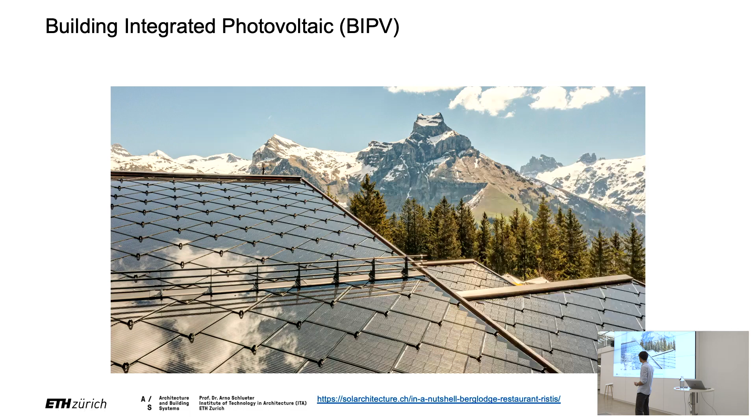Photovoltaics, you probably know, is a technology to convert solar irradiation into electricity. What's the difference to building integrated photovoltaics? It's a little bit undefined, let's say, but it should be on buildings, somehow as part of the building fabric, or attached or integrated into it. Here you see a nice example where the roof shingles are designed in a certain way, still reminiscent of old shingle design. You can simply put them onto your roof and still reveal the full aesthetics of solar cells. But you can also conceal them entirely. This one is a tower in Basel by Burkhardt and Partner, and many people would probably not know that this is a BIPV facade, because you can't really tell.

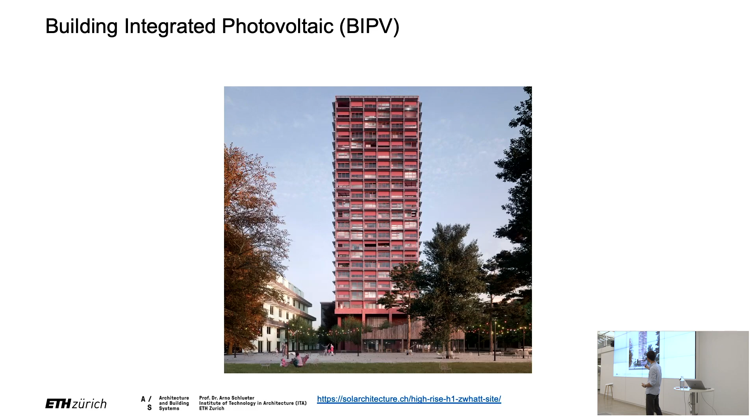Yes, there are some other examples. This one is by Boltshauser, an architectural professor also here at ETH, and they use Brise Soleil with PV, also really nicely integrated. And then you have more prominent examples, like this Novartis pavilion, also in Basel, where you have a BIPV facade integrated with a media facade. So in the evening, it shines with sparkly LEDs. Also, this one is BIPV.

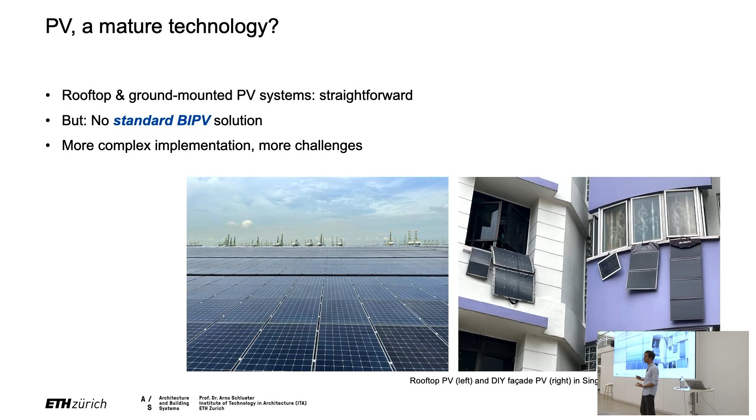What's the point of showing you all these examples? I want to highlight the difference to regular photovoltaic, roof-mounted or ground-mounted PV systems. This one you could quite safely call a mature technology. There are, of course, questions around it, but it's a rather straightforward technology to use and implement. In contrast, if you think about BIPV, there's no standard solution. This is a picture we saw in Singapore, you could also call it BIPV, but there's no standard BIPV facade. Every facade is more or less customized and special depending on the project, which means planning BIPV facades and buildings is more complex. It requires more specialized expertise and more challenges that need to be tackled, and that's why it needs a 360-degree view onto the topic of BIPV.

Specifically, we are talking about urban integrated photovoltaics. Anytime it's about buildings, the urban context also plays a role, and we have a plethora of topics to cover.

Of course, you want to design these facades, and that requires some engineering behind it, some simulation. That's a big topic in our module. You want to look into the technology and solve constructive problems. System integration is a topic, and how it reacts with the urban microclimate is also a topic. On top of all that, it's important which business models you apply, how you ensure social acceptance, and how it plays into the bigger system of how humans want to adopt this technology.

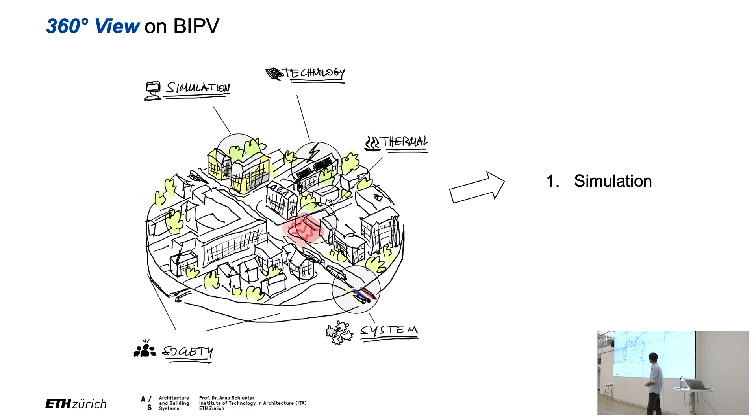So in this talk, we will have three bigger themes: simulation, optimization, and machine learning. And I will go through each of these three themes now.

So let's jump into the first topic, simulation. The subtitle is SML-XL for the architects here. It also shows the range of simulation aspects that we cover in this project. I will actually start with XL.

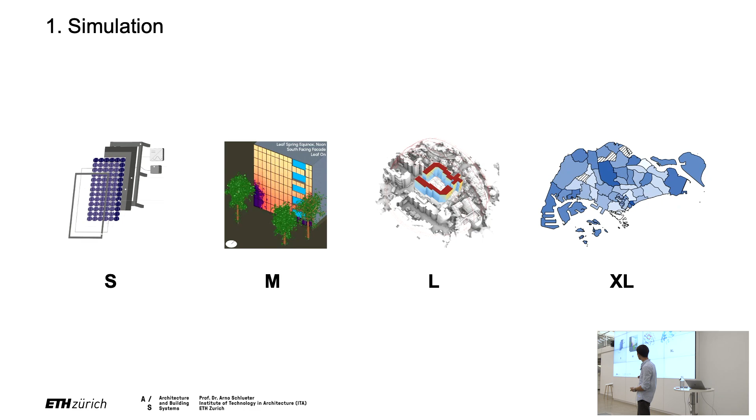Of course, the first thing that you would want to do is to assess the entire PV potential of a city, let's say. And we did that for Singapore. There's not so much magic behind that - these are quite established simulation programs, Climate Studio in that case. We simulated the whole city of Singapore in a rather high resolution to figure out what the solar potential is.

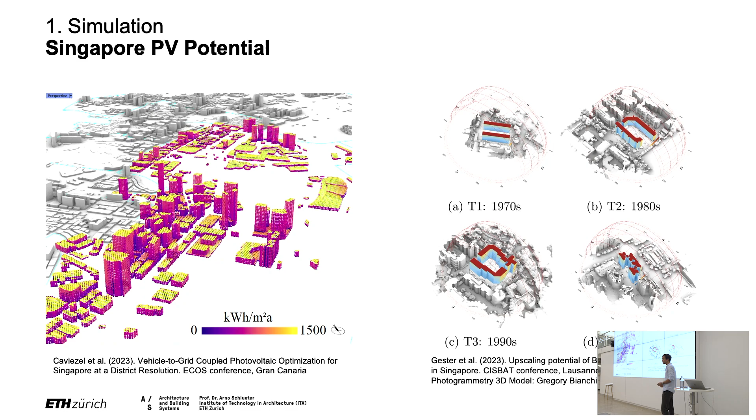Now, if you compare that image with that one, of course, you see some spatial differences, which would also result in certain detailed differences in how you perceive or estimate irradiation. That's why for certain typical typologies, we conducted photogrammetries to have a high resolution in the modeling.

What we found is, first of all, you can plot the whole city and look at where there's more irradiation, where you have a higher potential on buildings. Then you can split it up into these districts - let me explain this graph. Each column is one district, and it shows the ratio between energy production on facades over roofs. Anything above the dashed line means that district has more PV potential on facades than on roofs.

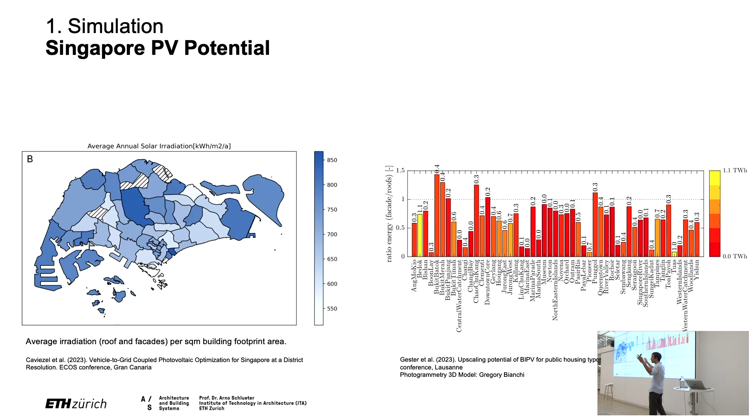That's quite special, especially for Singapore as a dense city. It means you can produce more electricity on facades than on roofs, which is very interesting. We can see there are a couple of districts where this happens, and this is where BIPV becomes especially interesting for us. If we add all these numbers together, in Singapore you could achieve 20 to 30% self-coverage of the total electricity demand. This is rather on the optimistic side, and we will see now why this might be potentially overestimating the potential. But in theory, it's possible.

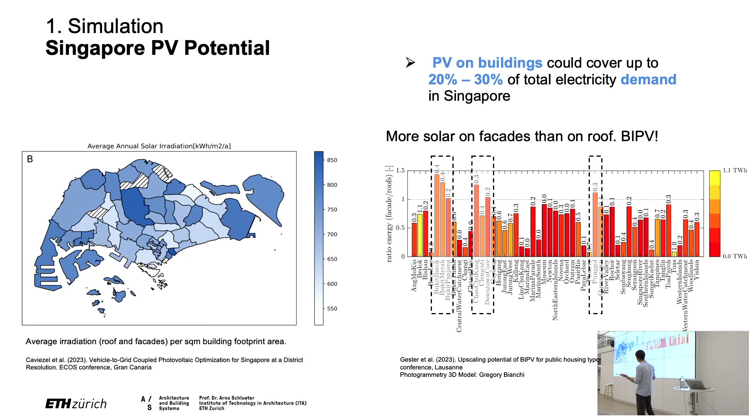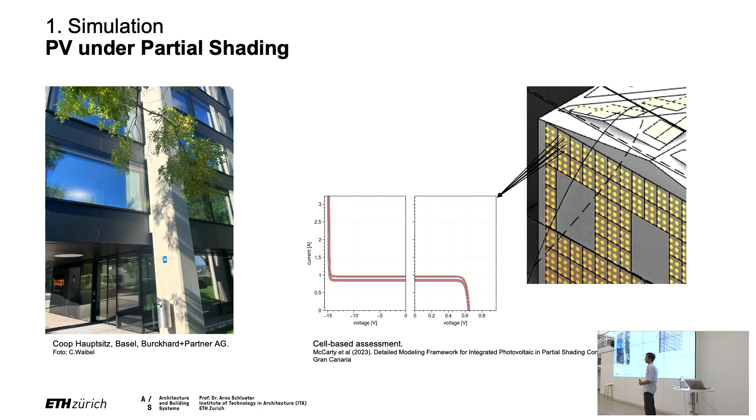In fact, most of the larger studies, most of the energy system studies in the literature, most of the assessments and simulations, they basically only simulate the irradiation on surfaces, and then say, okay, whatever irradiation I have times my conversion factor, and that's the electricity I can produce. What that assumes is that each of the solar cells actually produces electricity and is more or less decoupled from the entire module. Well, that's a bit too simplified, because in reality, we have electrical architectures.

For roof-mounted or ground-mounted systems, usually you only need one inverter. To spare you the technical details, they're all connected in one, because they have a very homogeneous shading situation, or no shading ideally.

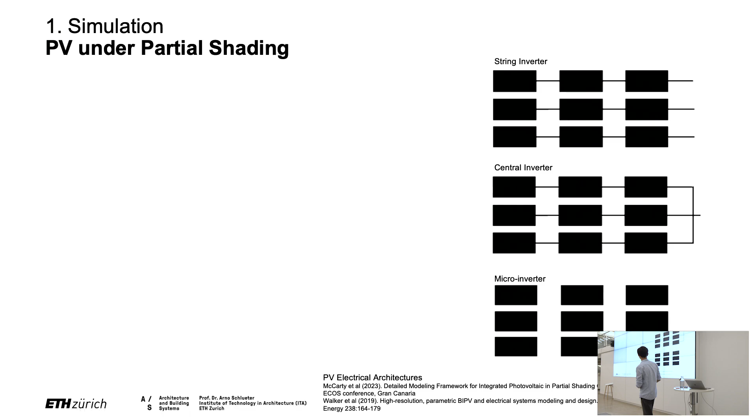On buildings you have very heterogeneous conditions, which means the current status quo is that you have string inverters. You string together several modules that are similar in size and irradiation condition, and they produce electricity or don't once one of these panels is shaded. Then you have microinverters where each module has its own inverter, and even if one panel is shaded, it doesn't matter for the rest, because each has its own control system. A more detailed sketch can also introduce bypass diodes, but let's skip the technical parts.

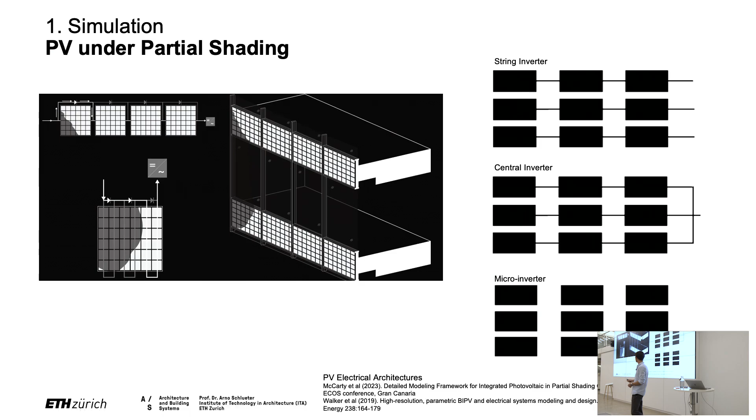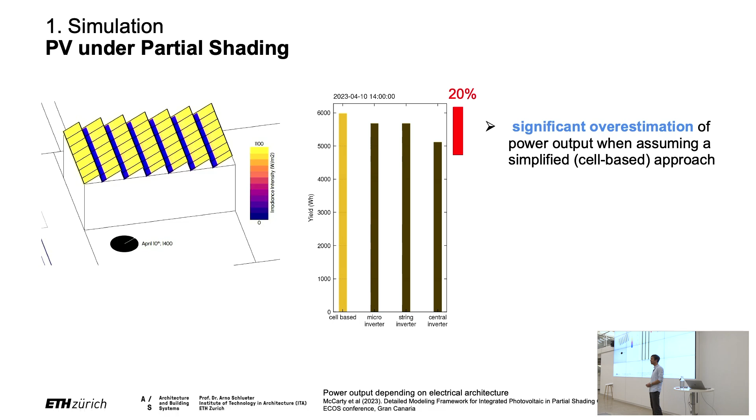If we simulate these differences - and Justin did that for this roof mounted system, which is not ideally spaced, so we have shading - it means that if we assume these different modeling approaches, and most studies use just this very optimistic cell-based approach, you have a difference up to 20% of yield. So that's quite a bit - 20% more or less electricity, that's relevant. To summarize, there is a significant overestimation of power output if you model it too simplistically, and especially for BIPV this detail becomes really relevant if you want to do it right.

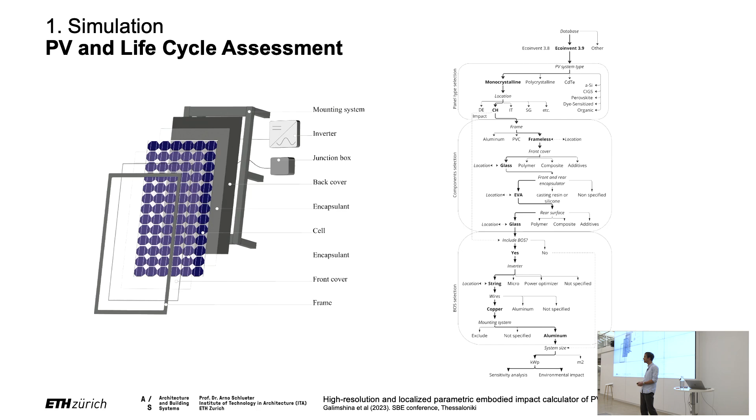Continuing on PV systems - of course they produce electricity, but they also consume materials. One of our postdocs specialized in life cycle assessment has decomposed the whole system and looked into the different components, how much each consumes, or what their embodied impact is. We developed this parametric calculator so you can assess the impact of these different components in a PV system. Turns out the most important part is the PV cell - over 70% of the entire embodied carbon emissions of the panel is actually the solar cell, and the rest becomes quite negligible. Maybe 15% for the mounting system, quite high, but the cell is really the make or break.

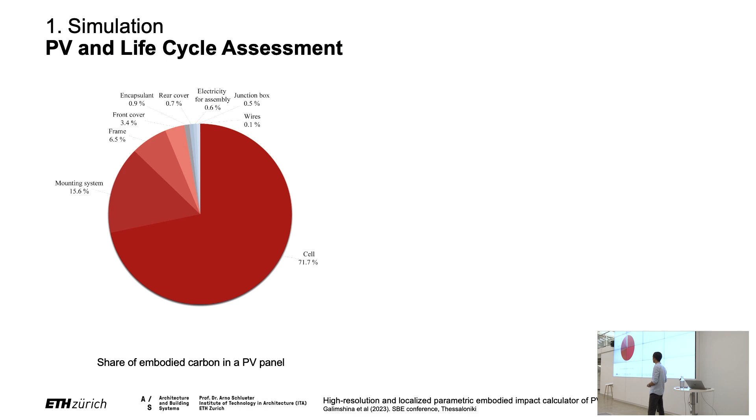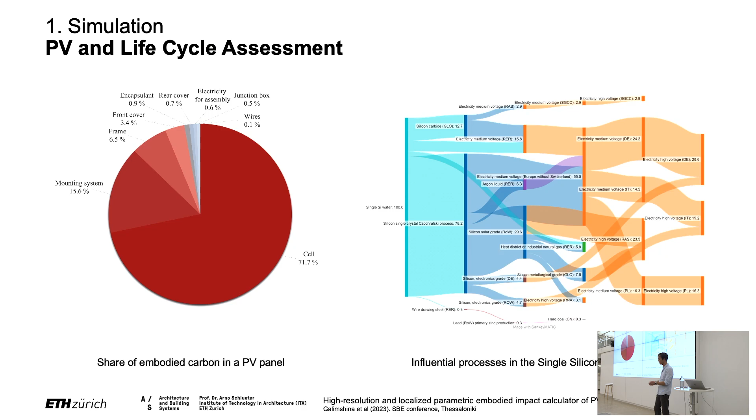That's why we also looked into the production process of these PV cells, how they are grown. To make it short, these are highly electrical processes requiring a lot of electric energy. You know where most PV cells are produced - currently in China, with a lot of coal electricity. That's why if you think about PV modules and have opponents saying they also produce waste and so on, well, there is a large potential to optimize the embodied emissions if you produce them in grids with low carbon emissions.

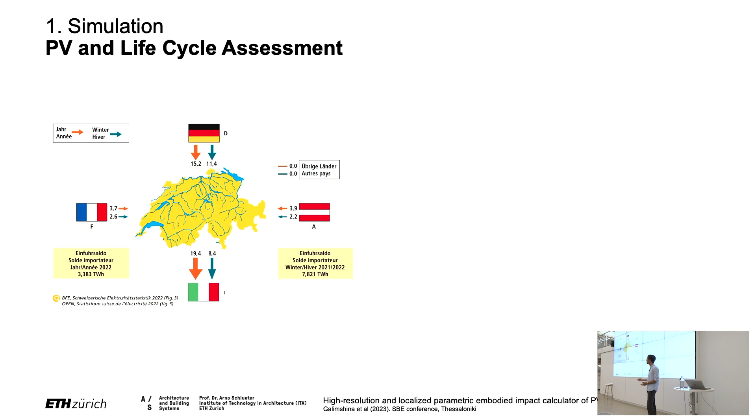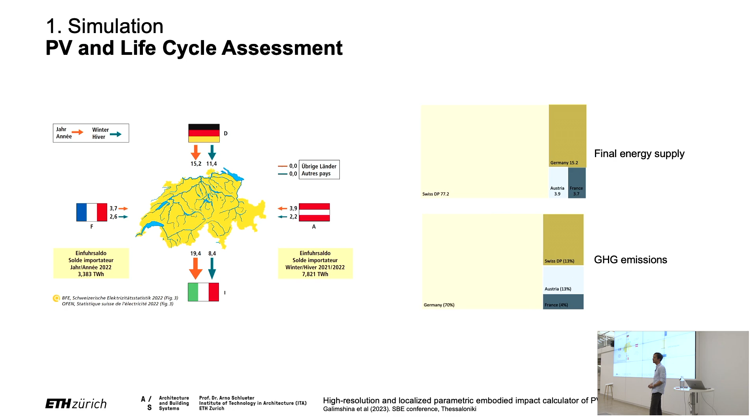Let's make a scenario if we produced them in Switzerland. You might be aware that Switzerland is like a transit country for electricity from neighboring countries - Austria, France, Italy, and Germany, a very important country in this story. As we can slightly see with these colors for the final energy supply, only 15% of the electricity Switzerland consumes comes from Germany. But if you look at that graph, 70% of the entire emissions in Switzerland come from these 15% of electricity from Germany. So why am I telling this? It's important - if we want to decarbonize the embodied emissions of PV panels, we need to understand how we produce them and under which grid conditions. Basically, the grid needs to be clean so we can also produce clean PV panels.

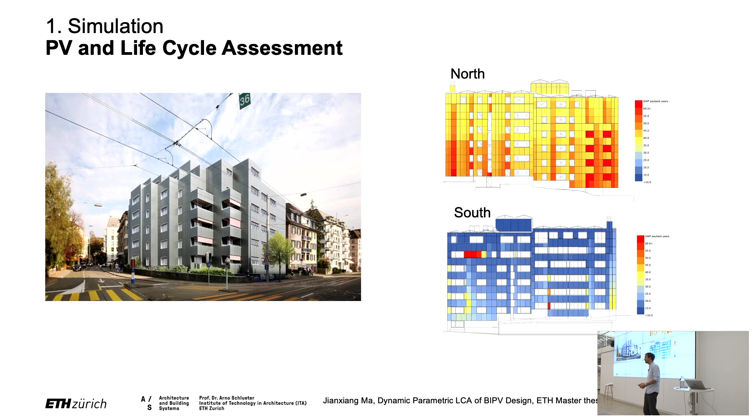If you know all these things, you'll also realize that putting PV is not meaningful everywhere on the whole facade. This is an earlier master's thesis here at ETH, where the student calculated the carbon payback time for each panel - blue means good, red means really not good. If you look at the north facade, all the yellow and red panels have a carbon payback time of above 30 up to 60 years. If you consider the lifetime of a PV panel, which currently has a warranty for 20 years, this is never going to pay back carbon-wise. So this is also very important information.

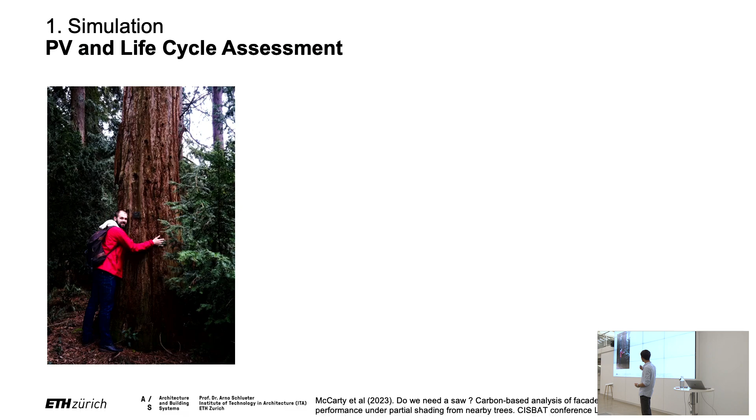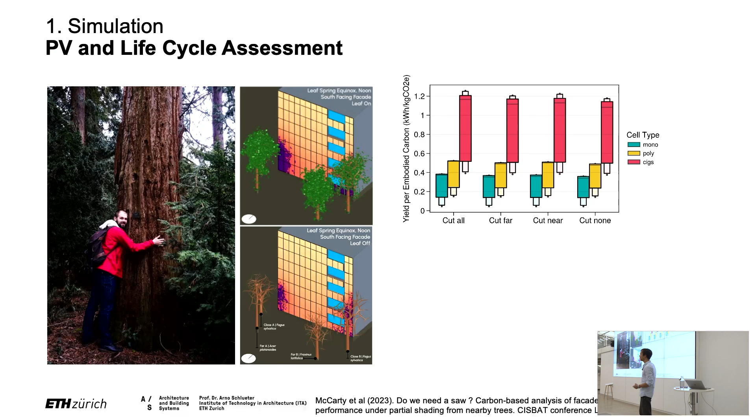We can think this further - Justin, our talented PhD student sitting over there, likes trees and wants to save them. Unfortunately, if you plan BIPV, some developers might want to cut trees down to make space for the PVs. We looked into that - it doesn't make sense. To summarize this graph, it shows the yield, basically how much carbon emissions each kilowatt hour produces. The difference between cutting all the trees down or leaving them, in terms of total yield, is quite negligible. But the impact of losing those trees is so high that you should just not do it. So in conclusion, don't cut trees for PV, at least not now.

This is also quite interesting. If you look at the three colors, these are the three major technologies - monocrystalline, polycrystalline, and thin film solar cells. Those who have worked with PV know that thin film technology is very inefficient - it doesn't produce a lot. But if you look at the carbon balance, it's actually much better per kilowatt hour produced. That's also quite important information.

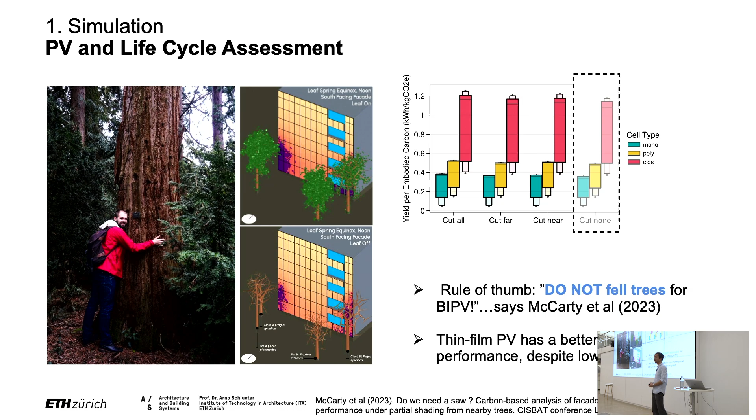So this concludes the simulation part. Let's go to the second topic: optimization from buildings to neighborhoods. For this chapter, we have two examples.

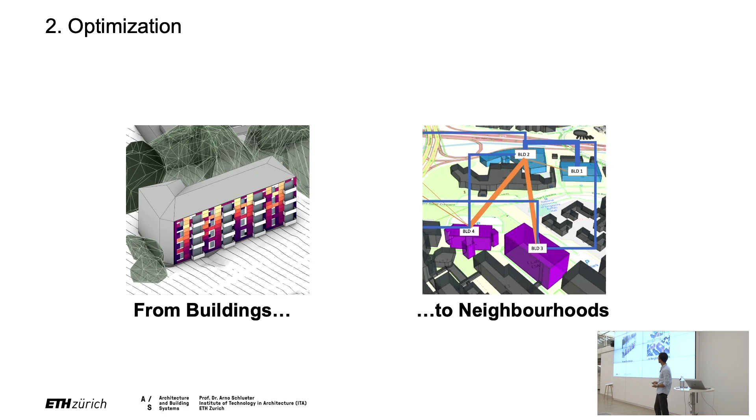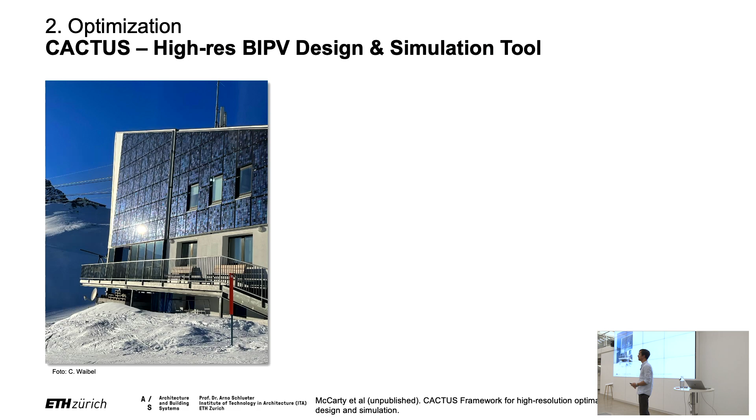Optimization of buildings. I see some MIP students here who have used Cactus, the BIPV framework. The idea is that if you have BIPV facades with a certain customized layout, you need to cut these cells into individual shapes. Also, if you have a shading situation, you might want to know which PV panels to string together and which not, so you don't lose electricity production.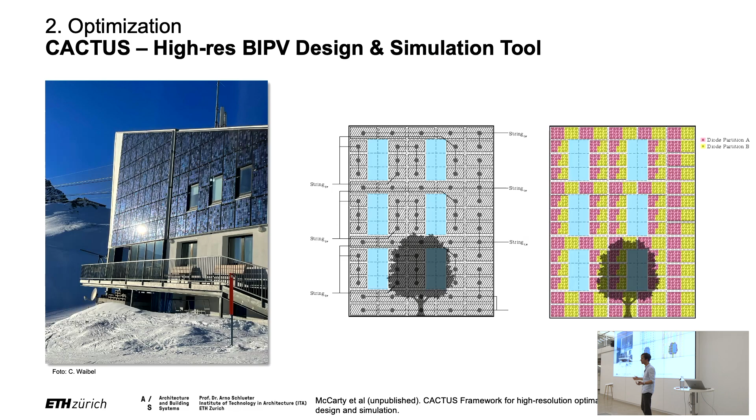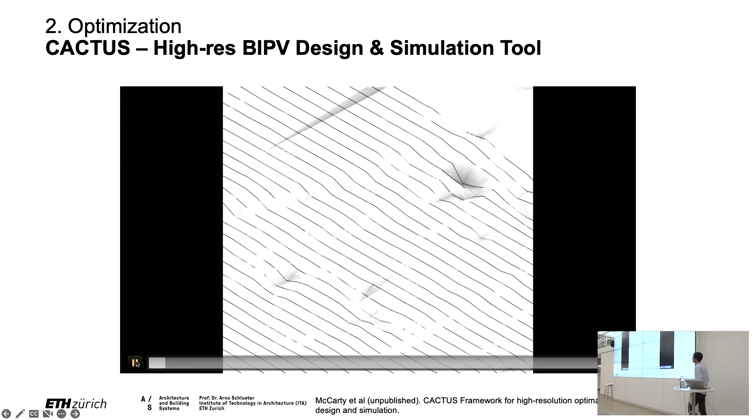This led to the development of our new tool, this optimal panelizer, let's call it. It's part of this Cactus framework that is still unpublished, but soon to come. What you can see here is that first you start with the facade and a panelization of the facade.

Then you conduct an irradiation simulation, so you know how much sun hits the facade. After that, you start inserting the solar cells. This tool does a matching of the cells, or modules, that would go together. Now you see those cells that are strung together. This has been manual work before, and now we have an automatic tool that does it.

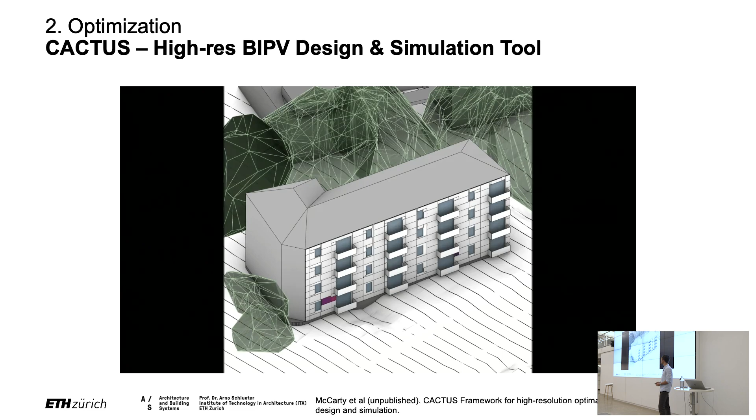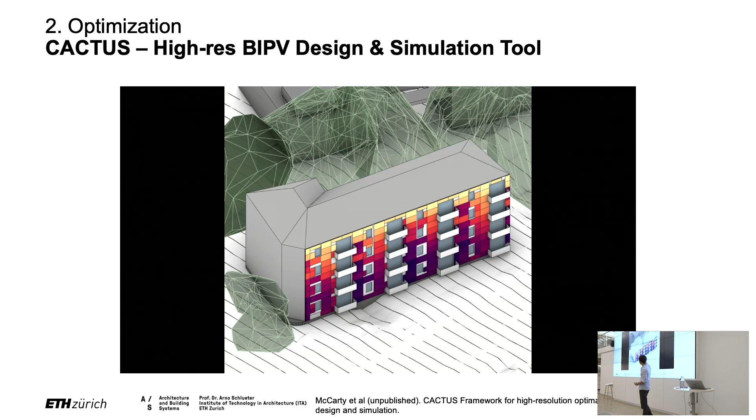And why is it relevant? Because it makes the whole planning process and production process much more efficient. You can also optimize these different panels and ultimately cut down on the cost.

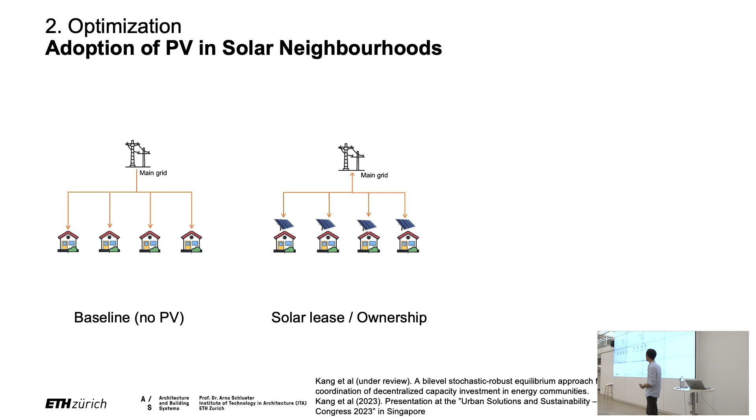Now, we actually use optimization a lot on a larger scale, on a neighborhood and district scale. This is relevant because of the following situation: the most common way you can use PV is you rent out your roof, or you just buy your own panel, consume the electricity on site, and feed the surplus into the grid. That's all you do.

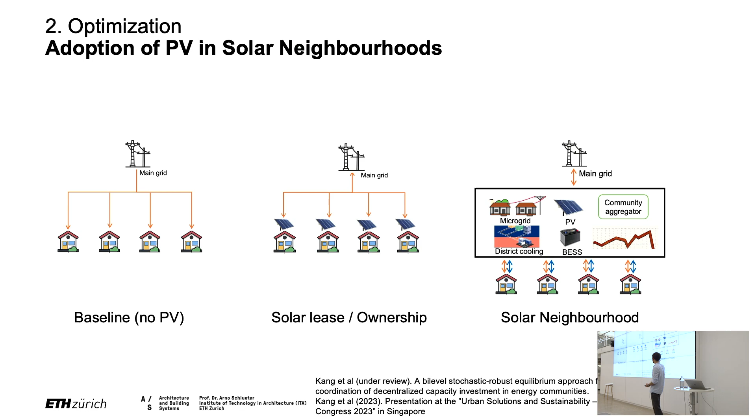But especially in Switzerland, there are already a lot of living labs doing more. There's the concept of solar neighborhoods, or ZEVs, Zusammenschluss zum Eigenverbrauch. This means buildings in a community come together, connect electrically and also with other energy carriers, and start to share energy and trade electricity internally. Other important elements here are distributed energy resources like battery systems, and some kind of control systems or community aggregator.

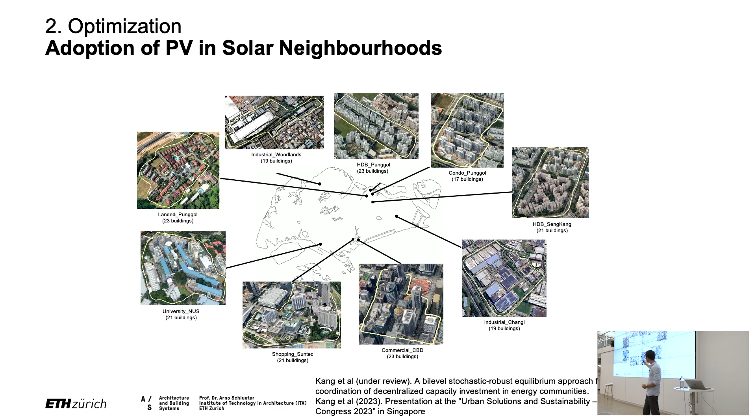Let me show you, we conducted this on a couple of case studies in Singapore. These 9 different case studies, some more commercially focused, some industrial, some more residential, and some more mixed. I'll summarize a little bit.

It's basically an optimization framework, which some of you are also familiar with. You require inputs such as building demand data and irradiation data. What we wanted to study is how important these different strategies in a solar community are—how important is it if you can share energy, if you can share the load within the district?

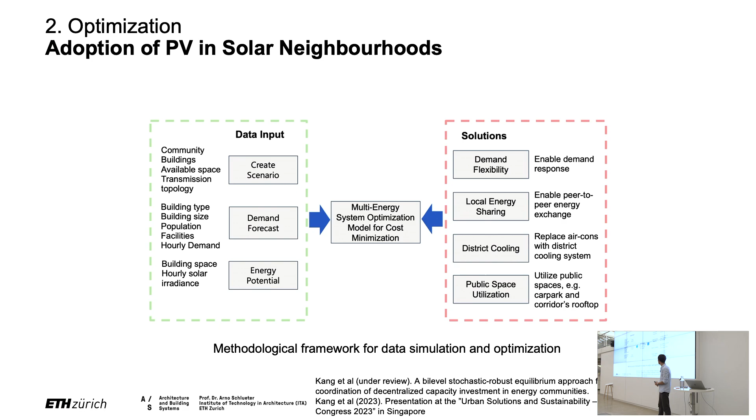How important is it that you introduce some kind of trading mechanism and pricing mechanism? How important is it that you start coupling the electrical side with the thermal side, and so on? That was the basic research question in this part.

What you can see here is an example of a Singaporean neighborhood, very dense. The blue buildings are those that have surplus electricity, and it's exported to other buildings that pop up in yellow. So these buildings have too much electricity, and they sell it within their own neighborhood to neighboring buildings for a better price than if they exported it to the national grid. Therefore, there's a financial incentive to do it—you just get more money than if you sell it to the grid.

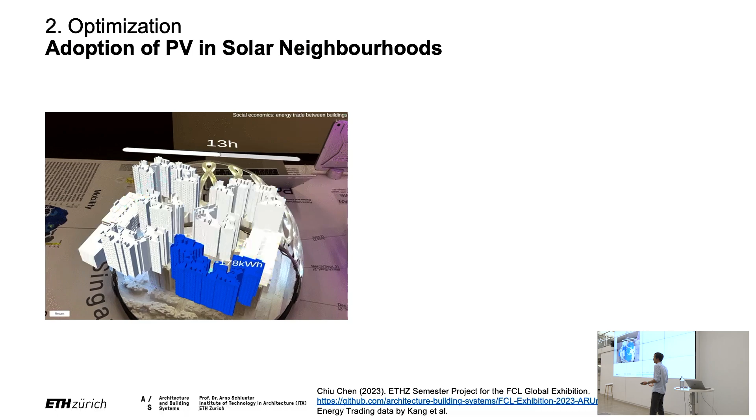But also from a grid perspective, this has certain benefits, because you don't cause strain on the national grid. By the way, this is an exhibition still running until April, I believe, on the Hilltop floor. If you want to play around with an iPad and have a look, feel free.

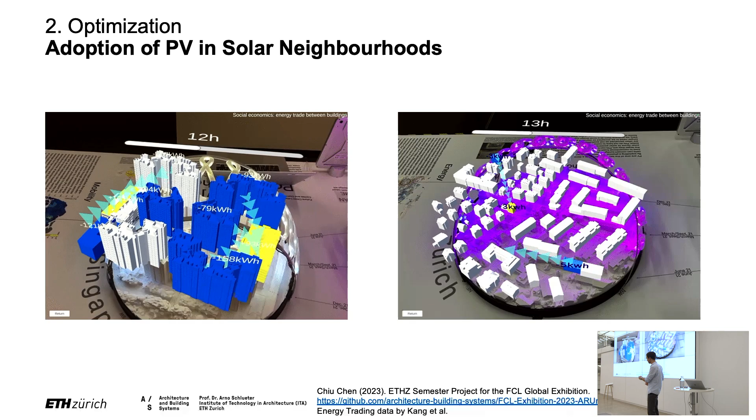Okay, so what are the results for these 9 neighborhoods that we looked at?

The total reduction of levelized cost of electricity, the cost per unit of electricity, is quite significant. This is just a table, but let's look at the big numbers: 40% in one case. So we can really make PV electricity much cheaper if you introduce these strategies into a neighborhood, into a solar neighborhood.

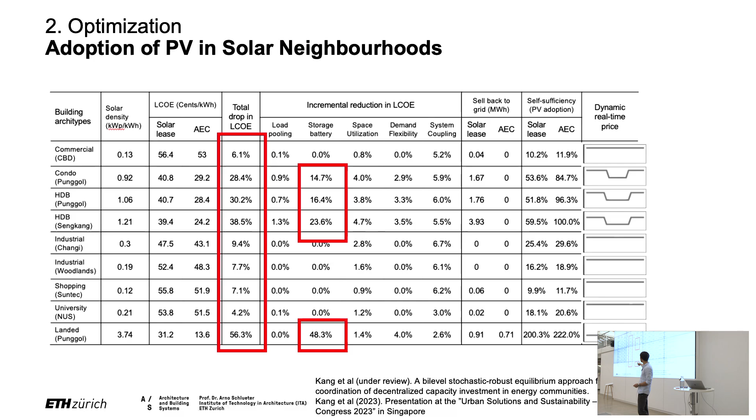What we also found is that storage systems, batteries, are one of the major key technologies that drive down the cost. So you want to make sure you introduce flexibility into your system, for example with storage. In one neighborhood, the cost reduction caused by batteries is 50%, the major driver. Solar self-sufficiency also increases significantly once you introduce these trading and sharing mechanisms, rather than only relying on the grid.

That summarizes it basically: solar neighborhoods is a good idea.

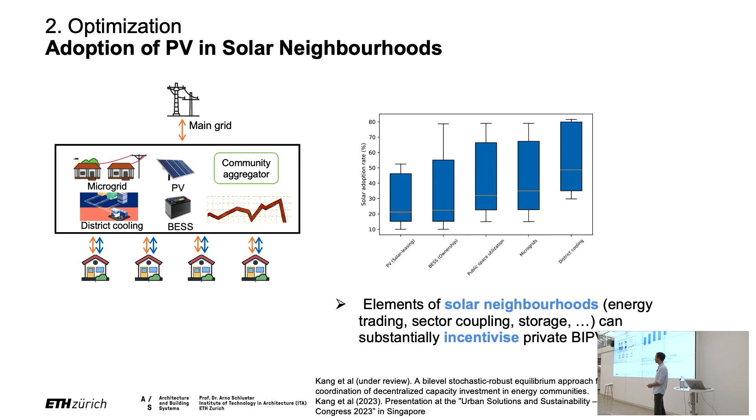That brings me to the last topic, machine learning. Also here we have a subtitle: more data. This one is about data, and I will talk about two projects in our team. One where we use a lot of mobile phone data, and the other is about facade design. Let's start with the mobile phone topic.

To begin with, this has something to do with electric vehicles and PV. The question is, what do PVs have to do with electric vehicles? Well, we want to charge our electric vehicles with green electricity, with PV, not with coal electricity. And it turns out there are some interesting synergies: if the sun shines and you don't need to drive around with your car, you can charge these cars and discharge them in the evening when there's no sun.

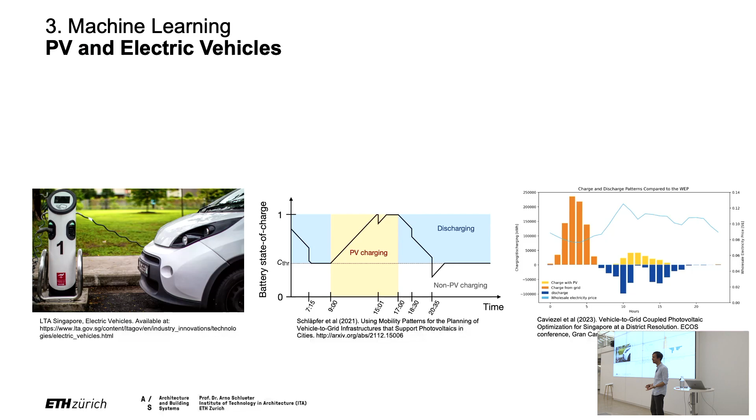We've done that in an optimization model. To summarize, it's really important to implement the right policies and control mechanisms, because if you only react to the wholesale electricity price, you actually charge at times when there's no sun, increasing strains on the grid. But there's huge potential to couple PV, including local PV production, with EV charging, and that's generally a really good idea.

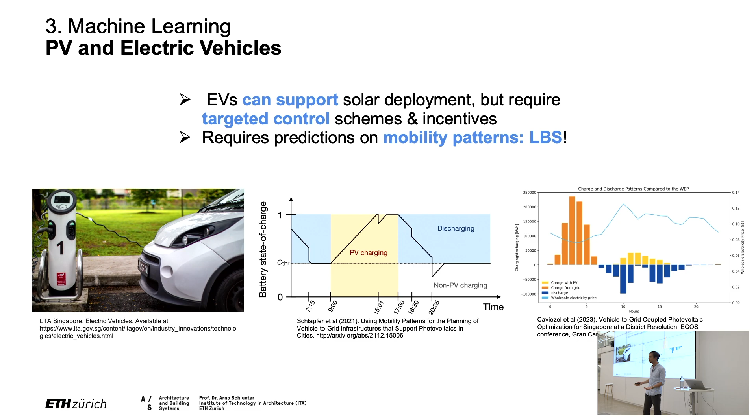What we rely on for these model links is mobility, or predictions on mobility patterns. We need to know when people drive around and where, and that's where we use mobile phone data from cell phones. Not in Switzerland, but in Singapore, this data is slightly more accessible.

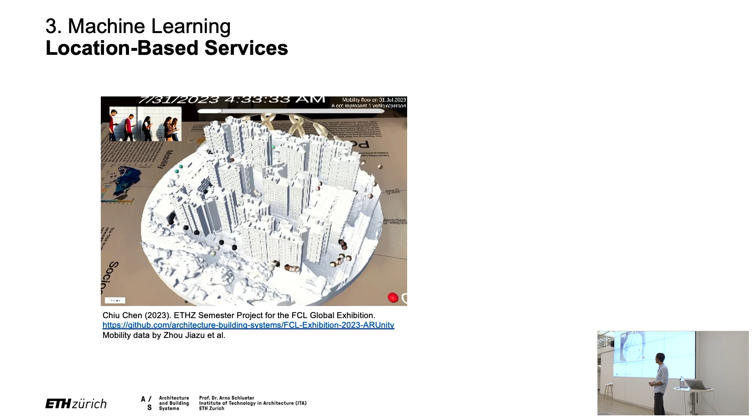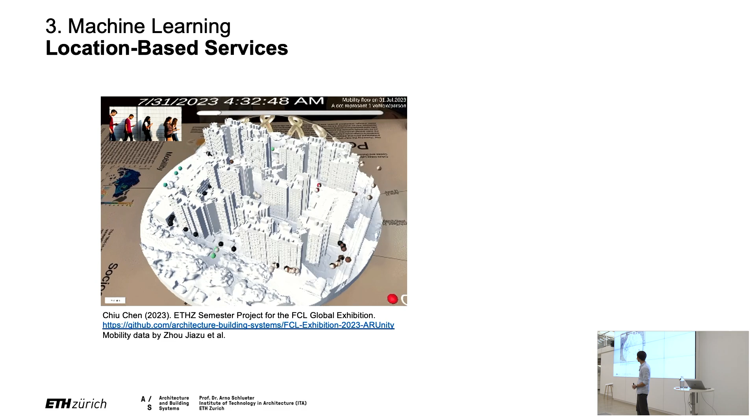What you can see here is each colored dot is one literal person walking around. It has been anonymized, and I think this is also synthetic data, so there's no problem sharing it. But this kind of data exists, so telecom companies can really track people around and see where they are. This is good for us because we can build mobility patterns out of it.

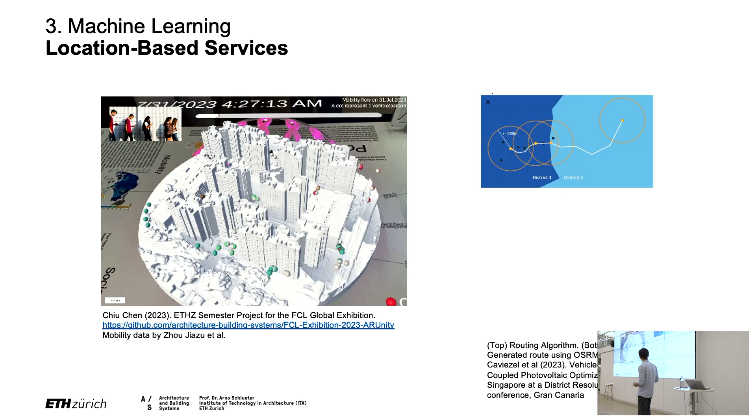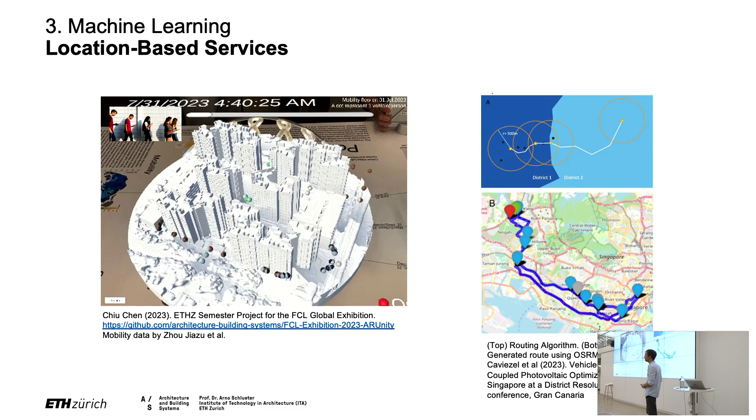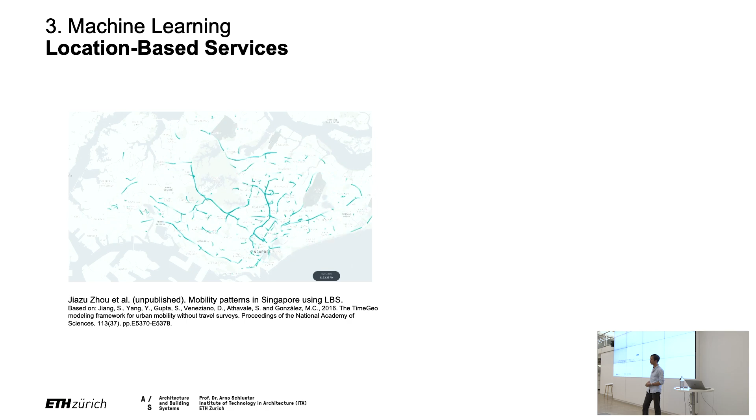We use routing algorithms on these data points, which are usually quite noisy and need a lot of filtering. But applying certain algorithms, we can predict the mobility paths of people for different days of the week and different seasons. This gives us the mobility demand for the whole of Singapore, electric vehicle mobility demand in that case, which is very useful if you want to couple it with local PV production.

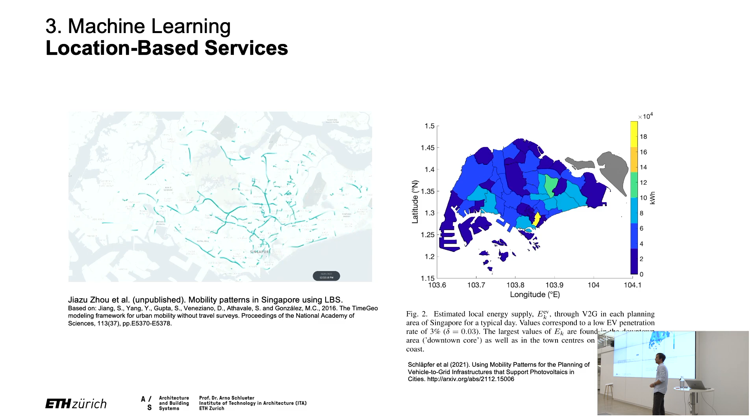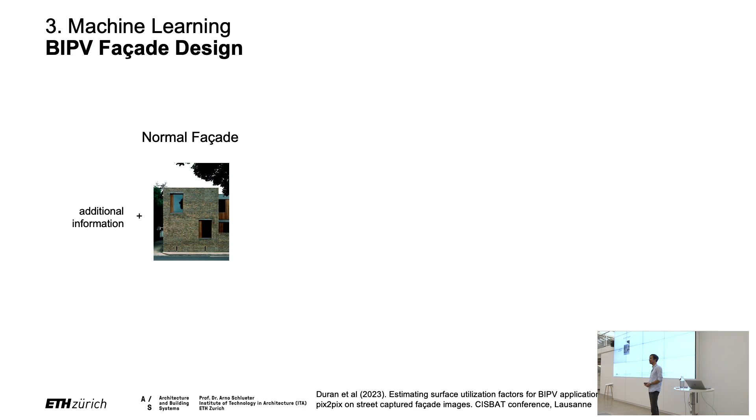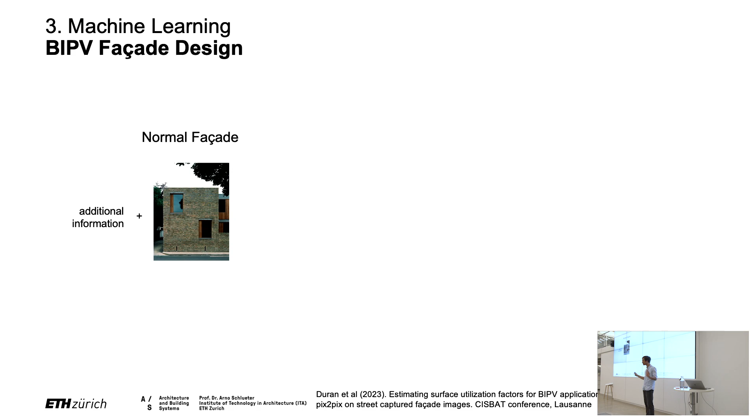Now coming to the last topic, from one of our esteemed PhD colleagues, Ayça. What if we only had a picture of a facade, and we want to click one button and then have a BIPV facade? That's what she's working on, but we're not there yet, there are some steps in between. One is that we want to understand the image, through segmentation, grouping elements into different categories. We want to know what's a window, what's a sill, what's a door, and so on.

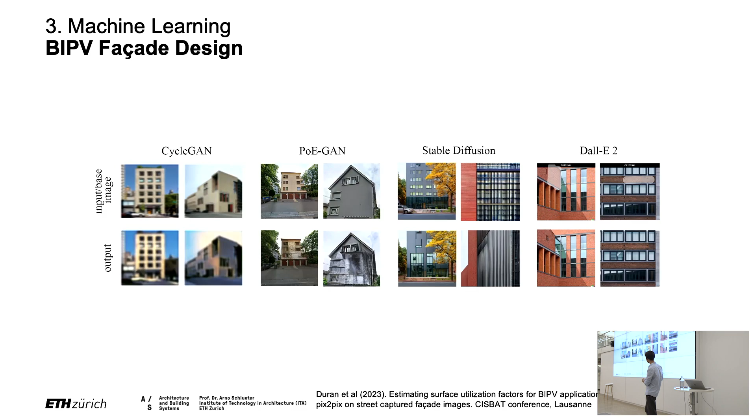And yeah, I can't see too much BIPV here, so it's not really working. The existing models are not sufficient yet, but that's the motivation for us. We want to get there. And as I said, the first step, what I'm going to present now, is this part of the segmentation of these images, and we want to understand where are these, or what are the parts of this image which are interesting for BIPV.

We used machine learning models, in this case a pix-to-pix model, to understand or to segment the image into those parts which are facade and BIPV relevant. And if we do that, and we do some more correction and a color content analysis, we understand: blue is always facade where we can put PV on.

And what we're interested in is, if we're using the segmentation technique, how does it compare to more common tools that are actually being used a lot also in Switzerland, such as Sonnenfassade or Sonnendach, or just these standard values saying that 40% of the facade in a multifamily house is accessible. And we wanted to question and challenge these numbers and say, okay, if we use segmentation, can we get better, more accurate numbers?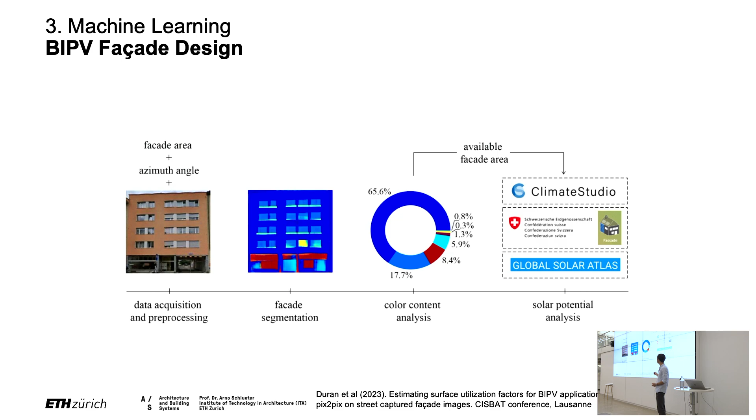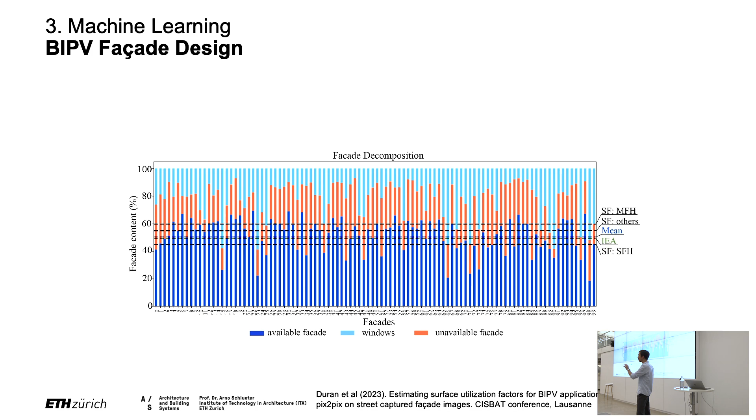This is a result for 100 buildings, and blue is always the available facade. These dashed lines are the different benchmarks from common practice, SF Sonnenfassade. So they report like 30% or 40% available area for single-family houses and so on. And what you can see is that there's, of course, a lot of variability. So these simplifications wouldn't really make sense in a detailed or particular case. That's a conclusion: the facade availability varies significantly.

If we now apply that to calculating PV potential or electricity production, we did that here for 8 buildings as an example. Let's zoom in into this one to explain this graph. What you can see here with these 3 bars is the non-solid one, using this standard assumption that 50% of the facade would be available for PV or BIPV. So that's like the standard assumption.

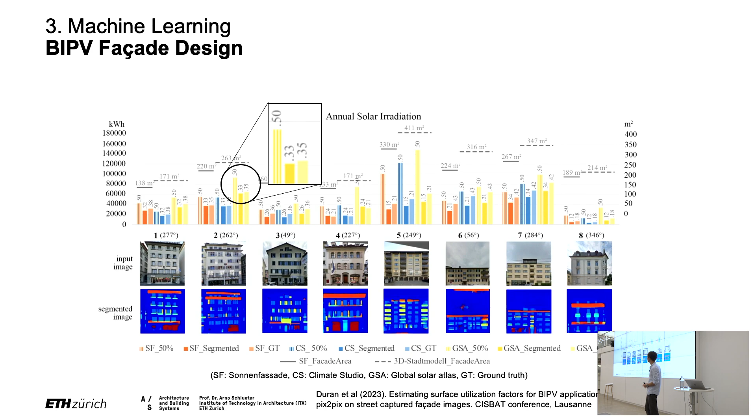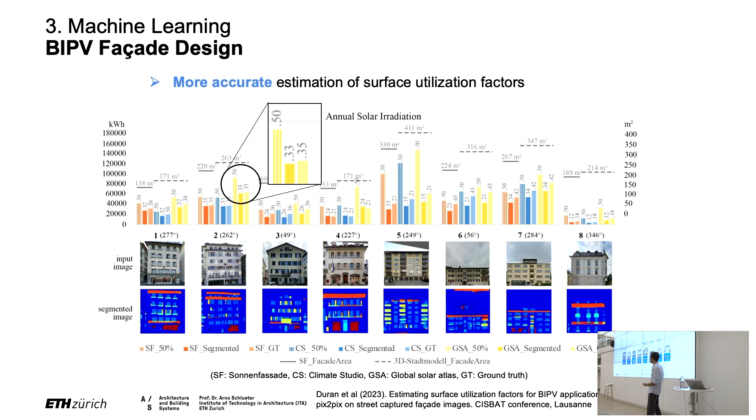And the solid bars, the dark yellow and the light yellow, those are the values that we calculate using the segmentation technique. As you can see, across all the bars, the striped bar is always significantly different to the ones using these segmentation techniques. And that also reflects in the calculated PV potential. If you use these wrong numbers, obviously you end up with quite high overestimations of PV production. So, as a conclusion for this part, more accurate estimations are possible using these segmentation techniques, and that's actually quite important if you want to make reliable predictions.

Well, the next step is still in production, so let's wait for some more things in the future. Just to mention the solar potentials part, this is also where it connects to other work in our team, for example the CACTUS framework that you've seen, and another machine learning-based solar model that I'm not going to introduce now, as it's actually shown in other talks.

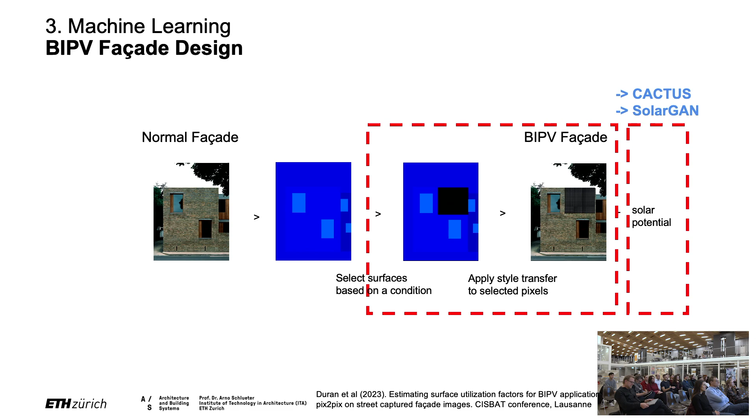So, as a conclusion, in BIPV research in our Powering the City module, we have found that BIPV in particular is quite unique. It's not the same as designing a normal PV system. It introduces a set of very unique questions, a set of unique problems that we're trying to tackle in this module. And it's also important that you look at them all at the same time, because of how they relate with each other.

Also, as I hope you might have seen, simulation, optimization and machine learning are complementary and necessary tools in all this process. You can't do everything with machine learning, you can't do everything with simulation, but it really needs this plethora of different approaches to answer all these different sub-questions.